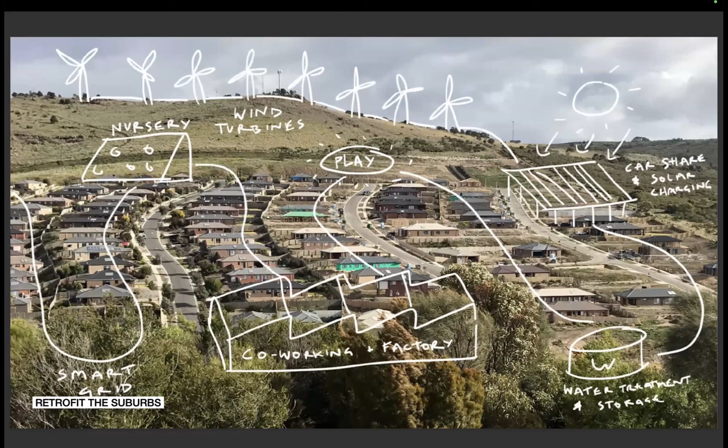So I'm going to look at, well, what would it look like if we started here and tried to get to here? A kind of systemic upgrading, retrofitting of those suburbs to suggest that rather than dragging us all under, the suburbs could be repurposed to be generous, to be spaces of sharing, to be spaces of sustainability, to be spaces of play, to be spaces of space, and to have all of those great things that the suburbs offer, but done in a sustainable way. So I'm going to give five examples very quickly. Some from an article I put together a few years ago called Winning the Battle at Home. All Australian examples, and then a handful of examples from some of my students who've been looking at these questions of how to retrofit suburbia the last few years as well.

I've structured the examples from this great graph, which I came across in Jeanne Gang's book, which is called The Art of Architectural Grafting. It's a new book. And what this graph shows, sorry, the text is so small, but I've blown it up as we go, is different strategies and what kind of a contribution they would make over the next 30 years. So between now and 2050, how much improvement in terms of reduction of greenhouse gases or materials saved would each of these strategies contribute over that time span?

And the data that Jeanne Gang's referring to comes from a European Environment Agency report. So some of them are great, like increasing the intensity of use, retrofitting, of course, maximizing recycled content. So I've kind of used those headings to structure the different examples. Starting at number 5, use of prefabricated facades. So you get 29 points for doing that.

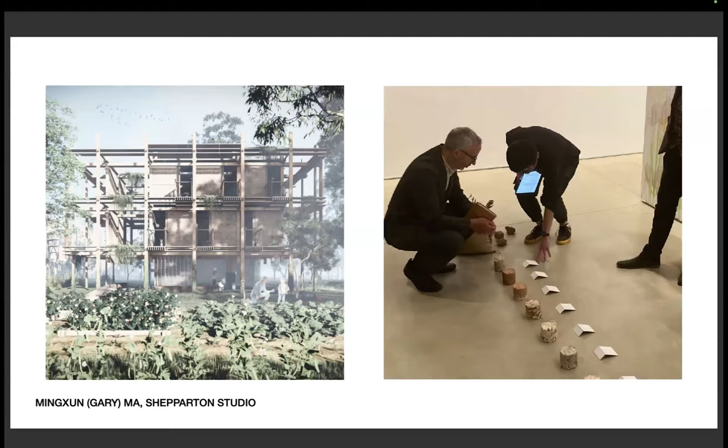What's the comment? We cannot see the share. Oh dear. Well, I'm nearly at the end. We'll have to send it around to the people online. That is annoying. We solved it for the room. Can. Yeah. Oh, I can.

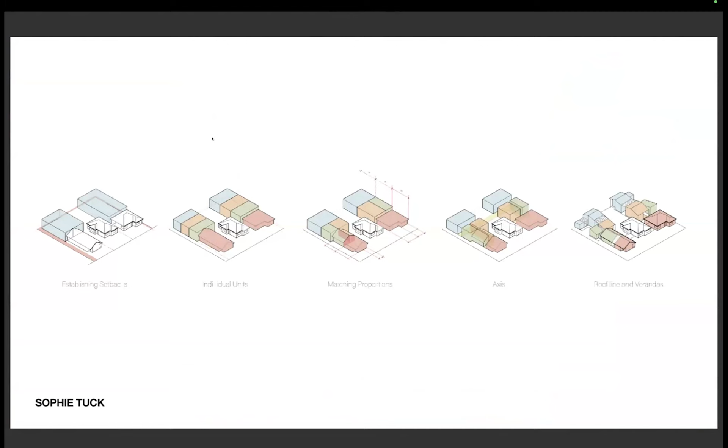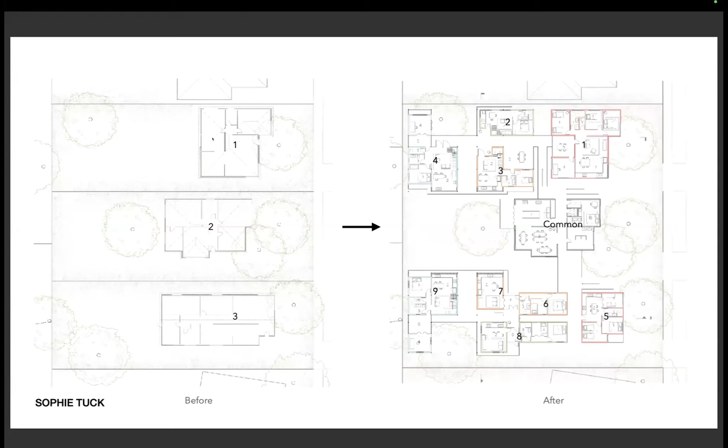And those are nine homes which are one and two bedroom, so much more appropriate to the housing need, particularly in the regions where we have a huge excess of three and four bedroom homes, but very few one and two bedrooms, which are more affordable. And all built in a way that is very easy to edit and to build, no fancy technology, but driven by a kind of social center for this house.

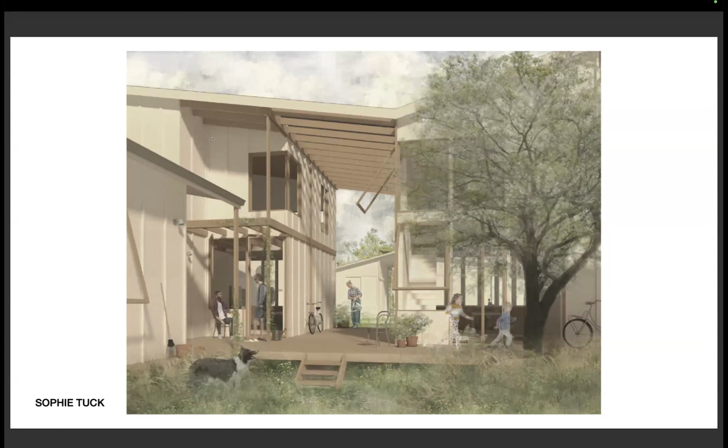So you can imagine cluster living, kids running in and out of different people's houses, a kind of secure shared garden in the center. And that was driven by her research into the role that the house plays in asserting gender roles and how to subvert that. She then did a quick study on the whole block. If you took 19 homes, you could have 42 homes with this kind of strategy.

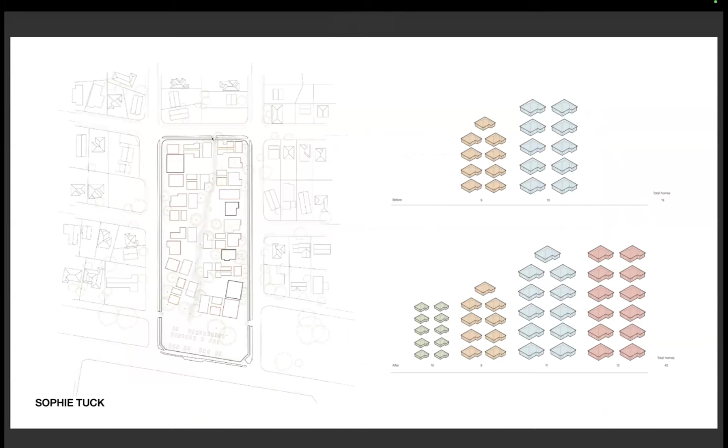So again, densifying, intensifying, with it almost invisible from the street. You wouldn't know that there was a development happening, and yet you've doubled the number of homes, even more than doubled the number of people living there. And that's the beautiful vision of Sophie's project. I will end there, and I'm sorry that we started late, but I wanted to just make a short conclusion to say,

as each of these projects illustrate, getting to zero is difficult and unglamorous, requiring an attention to detail, taping every gap, and dogged rigor in researching every product that's not widespread in the construction industry, nor celebrated in the design industry. In the last issue of AA, I wrote that confusingly, good architecture is not the same as architecture that does good. There I was referring to social good, but the same could also be applied to environmental good.

This work isn't properly valued yet. Shrouded in technical jargon and data, it remains difficult to make sense of for anyone except those with niche expertise. Architects can do much to cut through this complexity and to demonstrate sustainable living that is popular and affordable. It's time to create this positive vision of a future that really does touch the earth lightly.

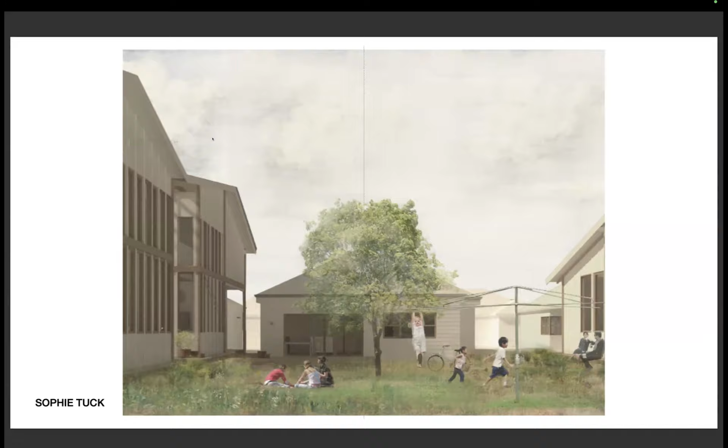Thank you. Do share screen one. Hopefully that has come through. Yes, we're seeing it. Technology, right? Seamless, Tom. Oh, indeed. We rehearsed this for sure.

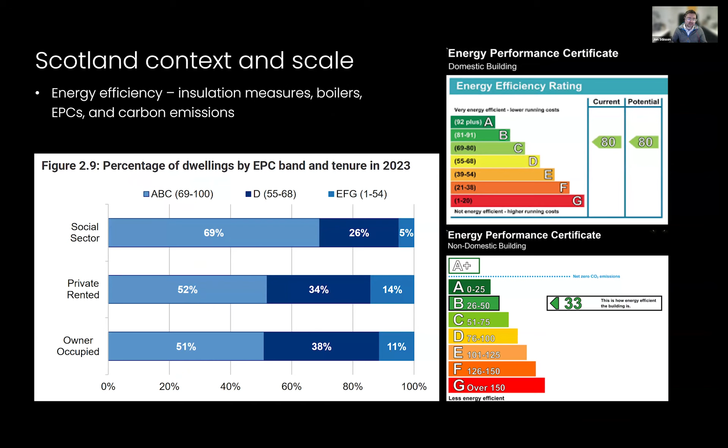So we use the Energy Performance Certificate, or the EPC, as a primary KPI for our domestic dwellings energy efficiency. On this relatively simple scale, A is great and G not so great. It is the single most important metric, though, for the allocation of retrofit funding, and it is the metric used by national and local authority to define the impact of the funding they're allocating for domestic retrofit. It is a very crude tool. It has a lot of limitations, and I'll quickly touch on that later.

So that has shifted the focal point in our retrofit to net zero. Carbon was always a big important element for us, but now we must retrofit to not only encompass carbon, but also cost in terms of fuel cost, and comfort in terms of occupancy comfort. So that has given us three C's of retrofit: carbon, cost, and comfort. And there's a fourth C that we're bringing online, which I'll come on to in a second.

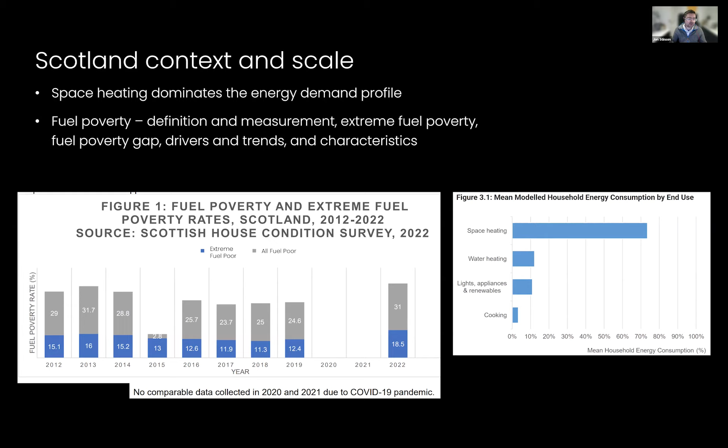But in the interest of time, I'm going to group it in chunks of different years and give you a quick overview of what the real lesson was, and then I'll start to bring this to a close. So from 1999 to 2005, that was a kind of epoch moment. That gives Scotland authority over what England was doing with the energy efficiency of buildings. It set the new Scottish building standards, and it introduced the concept of an energy performance certificate. In 2007 to 2009, this is when we started getting real guidance and insights and pots of funding to experiment, test out, and do demos and pilot studies on what retrofit means.

And it also started the Passive House movement in Scotland and introduced the idea that retrofit should be data-driven. I'm going to also come back to that. In that 2007-2009 period, we, as many others, had that horrendous market crash, which really shaped the years after 2009. So after 2009, policy really took a bit of a back seat because there was a massive focus on recovering the new housing market.

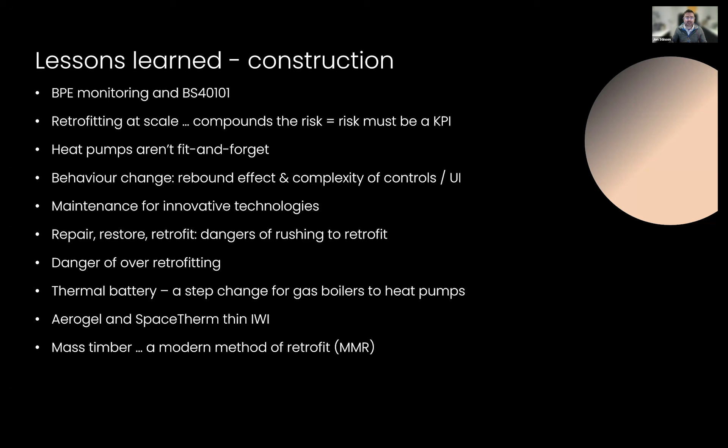And finally, we have learned the power of mass timber as a modern method of retrofit. So if we need to extend the home, not just retrofit the existing envelope, if we use a super energy efficient system like mass timber CLT, for example, that means we can massively improve the whole building's energy use intensity. So last couple of slides.

And it helps us to identify if there's something going on in the building that we can't see with the naked eye. Then we use all that real world data to calibrate our energy and building performance models. So we get a calibrated digital twin of the physical building. So if we do decide to only apply one retrofit intervention, we can immediately see what knock-on side effect that has in other aspects of the building. So we don't end up building in and locking in other issues.

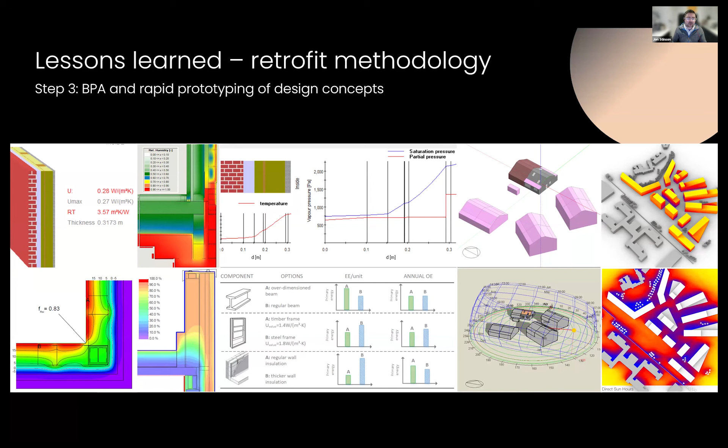And the final step is once the retrofit interventions have been applied, we go back with our building performance evaluation hardware and we remeasure what has happened there. And that provides three really important outputs. It's a quality assurance check that we did the right thing. It provides an as designed, as built comparison. It provides a pre-retrofit, post-retrofit comparison and helps to quantify and validate the return on investment. And all that feedback knowledge turns into feed-forward training and skills material.

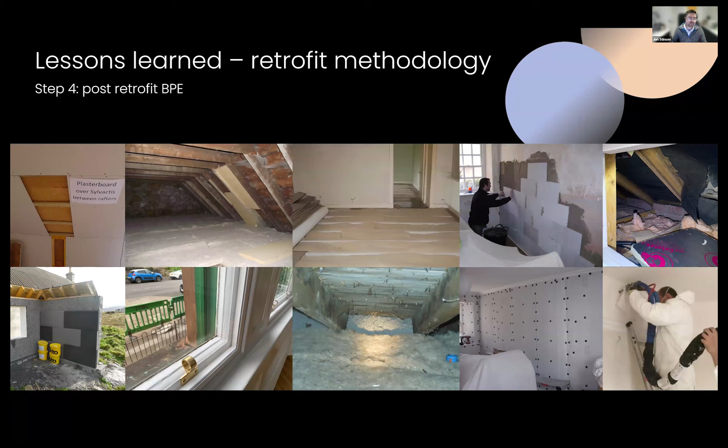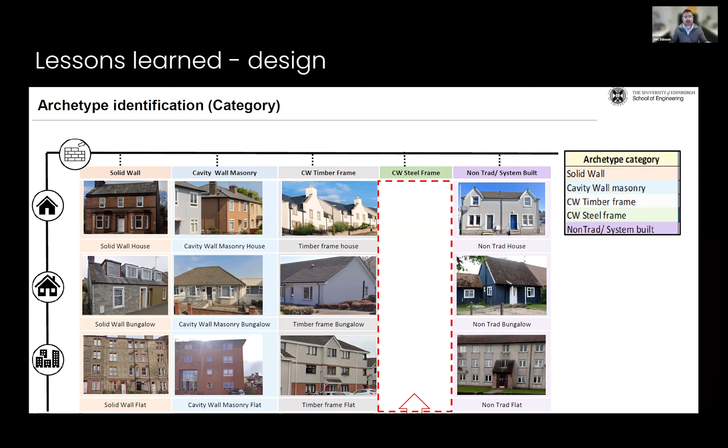I just want to share the last couple of things with you in terms of what the country is doing at the moment. So an academic consortium led by University of Edinburgh and supported by ourselves are taking Scotland's 2.7 million dwellings and those very crude 5 archetypes that the Scottish House Condition Survey have created. And we're creating a very comprehensive standard set of archetypes specifically designed for accelerating mass retrofit and having targeted intervention per cluster, as opposed to taking a dwelling by dwelling approach.

In recent months, we've got the Scottish National Adaptation Plan, which has introduced the 4th C. So if you remember earlier, I mentioned there was 3 C's of retrofit: cost, comfort, and I forget the third one. Cost, comfort, and carbon, sorry. The 4th C is now climate, which means we have to design our retrofit interventions that are climate resilient and climate adaptable.

And because we've still not solved our fuel poverty problem, we now are going to get design guidance to help us get from 34% of the population in fuel poverty down to 5% in the next 5 to 15 years.

Finally, then, we have the Construction Innovation Centre in Scotland, the Built Environment Smarter Transformation, or BEST, and they've been mandated to be a single source of retrofit wisdom for the country, combining all the knowns and unknowns into one collaborative hub with a scope of delivering retrofit knowledge and workshops for contractors, trades, architects, consultants, designers, and all of our 13 universities plug into this knowledge base, creating a single source of knowledge and point of contact.

And because we know that our EPC calculation methodology is pretty much busted, we now have the EPC reform consultation, which is ending this month, with a very clear objective of turning EPCs from a calculation method into an in situ measurement method to define the building's actual performance before we decide on retrofit.